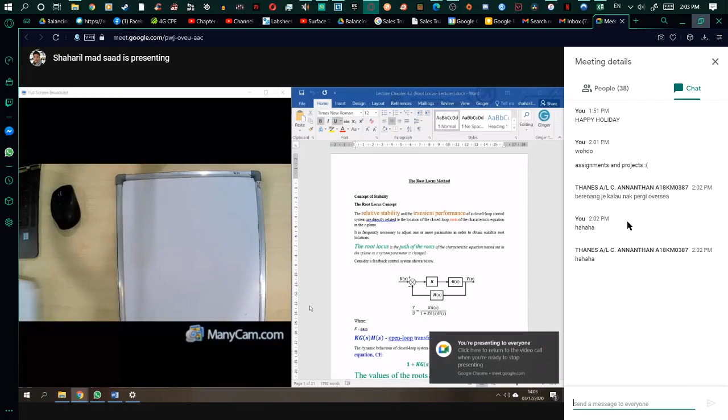Now Johor Bahru is quite critical, right? The numbers of COVID-19 is increased day by day. Okay alright, doctor on call, okay good.

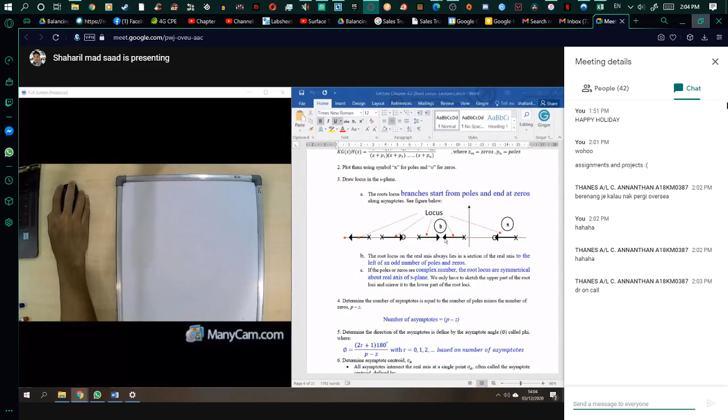Last Sunday we learned about root locus, so we drew a root locus. By the way, there are some rules you need to follow. The most important thing is the starting point is the open loop transfer function, KGH. Then you plot them: if it's a pole, make a cross; if it's a zero, make a circle. This is the rule for the locus, so the pole cannot meet pole, and zero cannot meet zero. If you have pole and pole, that means there will be some breakaway.

So for today we will look at the case if we have a complex pole. Based on this guideline, we can see that if the poles or zeros are complex numbers, the root locus are symmetrical about the real axis of the S-plane. So we just need to sketch the upper part of the root loci and mirror it.

Alright, and then you have done this one: determine the asymptote and so on. We also have done breakaway and breakpoint. So then we want to see what we call it - number 9, we're not done yet for the complex pole. We will see the departure angle after this, and the intersection for the imaginary axis, which we can find using the Routh stability table.

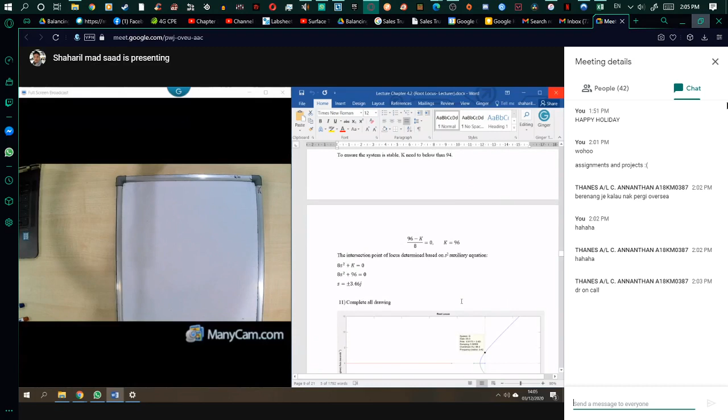So after that we can see the intersection point, it should be 96 here, right? Okay, then this one, the intersection there. Alright, and for example 4.4,

let's just go through this one. So you are given KGH, the open loop transfer function, and from this you can find the zero. In this case you don't have any zero - you don't have S plus something. You only have the pole, which is equal to -2 and also -4. So that means the zero is 0, and the pole is 2. So to find the number of asymptotes,

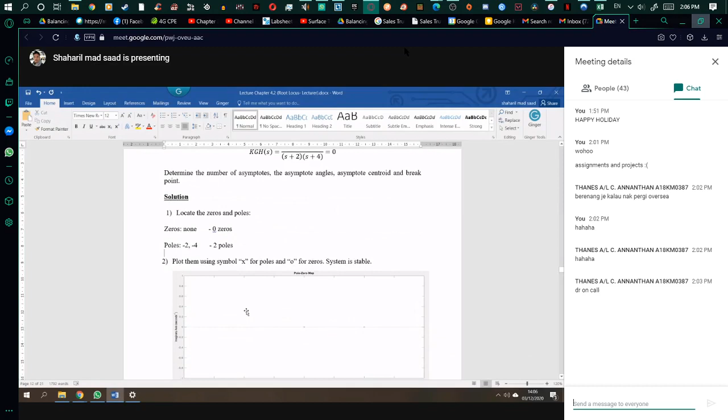you plot it using x or cross for the pole, and circle for zero. You plot it, then next you draw the root locus on the real axis first. So you can see these two poles lie on the real axis, so you just draw it. Since you have two poles here, there will be some breakaway, right?

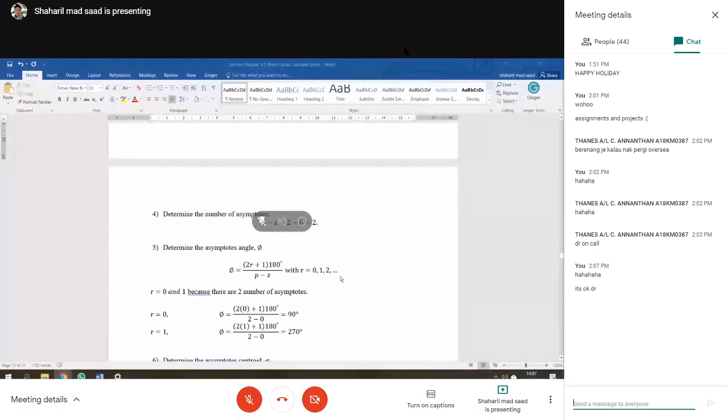Sorry guys, my daughter - I asked her to sleep but she's hyperactive now.

Okay, and then determine the asymptote angle. Then you find P and so on. The asymptote angle is depending on your number of asymptotes. So asymptote means the guideline in order to draw the locus.

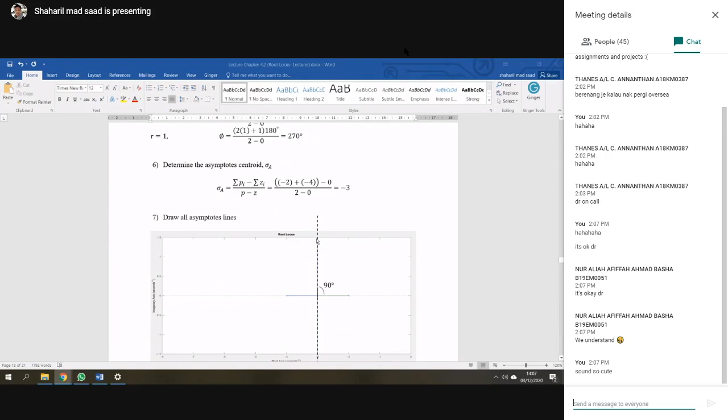So for example, this one you got the asymptote angle equal to 90, that means you draw this one to be 90. But in order to draw this, you need to find the asymptote centroid first. So how to find the asymptote centroid? It's the summation of poles, right?

That means you only have -2 and -2 plus -4, and you don't have 0. This will be -6, then divide by the number of asymptote P minus Z, so 2 minus 0, you get -3. So that means your asymptote centroid is -3 here. Then you need to draw two asymptotes: one is 90, and the other is 270. So this one is 90, 180, 270 here. This is the asymptote.

And then after that, we need to find the breakaway because this is two pole, right? So there will be some breakaway. Okay, so how to find the breakaway?

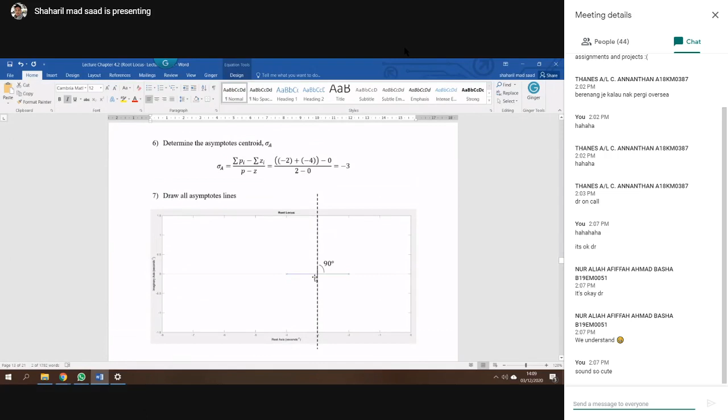So you need to use the characteristic equation 1 plus kgh. From that one, you need to find dk over ds. There we find the k here. So we find the dk over ds equal to 0. And then you got it 2s plus 6. And then you got it s equal to -3.

So that means the breakaway will be also at -3. Okay, at here. And then, okay, so you draw the root locus. Done. Intersection, that means there is no intersection, right? Because you can see that the asymptote angle going straight. So that means your root locus will go straight. So there is no intersection to the imaginary axis.

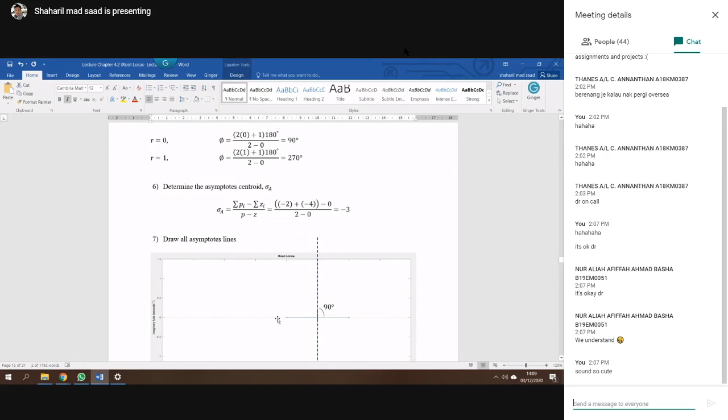So then you complete your drawing. So you can see that this pole, the first pole, it can be going down, right? And the second pole, it can be going up, right? So it doesn't matter if you write it going up and going down. But in order to know in detail how it's going down or up, you need to do like what I told you before. You need to put the value of k here. If that's it, then you try to find the roots. K equal to 0, k equal to 1, k equal to something.

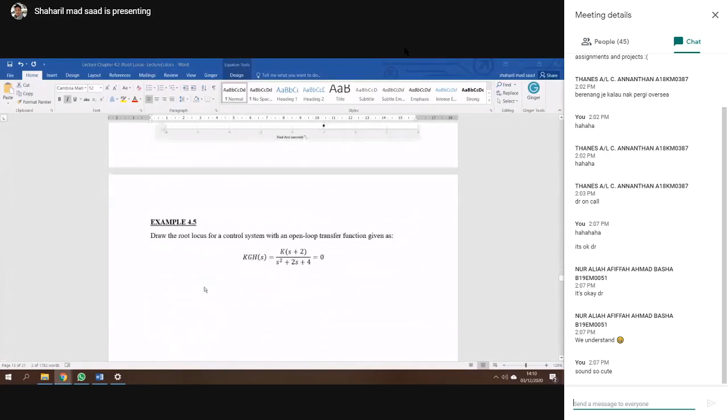That's it, example 4.4. I hope that everyone can take a piece of paper. We can do it together. Maybe you can share with me how you draw your root locus.

Okay, everyone. So I want to do this example 4.5. Okay, done.

Example 4.5. Draw the root locus for a control system with open loop transfer function given as kgh. You are given kgh equal to k times s plus 2 divided with s squared plus 2s plus 4. So for today, we want to look if our system have a complex pole. So what happens, right?

So I hope that you take out a piece of paper and then you can follow my step, so that you can learn it. So first one, you need to locate the zero and pole. So right now we have pole and zero first. Zero now you have this one. Zero, you look at the numerator, right? This one is the denominator. So now you have the zero.

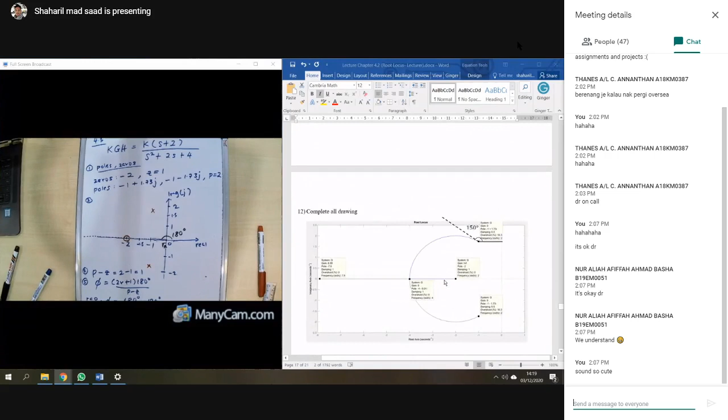So now we look at, you have a pole, second pole, and also a zero. The concept is one of the poles we try to find a zero. So it will be like a circle. However, in order to find the zero, it will have some breakaway point here. You will look into that.

Now the next step is you can find the breakaway point. That means you need another mathematical solution on that. Number 8: in order to find the breakaway, dk over ds equal to 0.

Now you need to have 1 plus kgh equal to 0, so 1 plus k times (s plus 2) divided with s squared plus 2s plus 4 equal to 0. When you settle it out, you get k equal to minus s, times (s plus 2) divided with s... wait, equal to minus (s squared plus 2s plus 4) divided with (s plus 2).

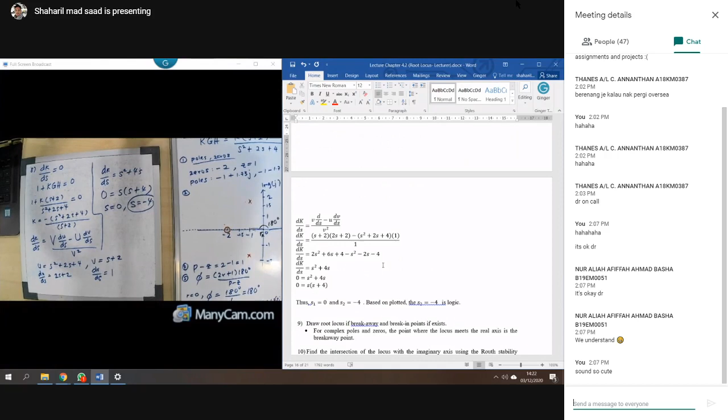So far, do you have any question? I think this one, so you need to solve it by using this formula, right? So we look at this formula during your... I think form 5 and so on.

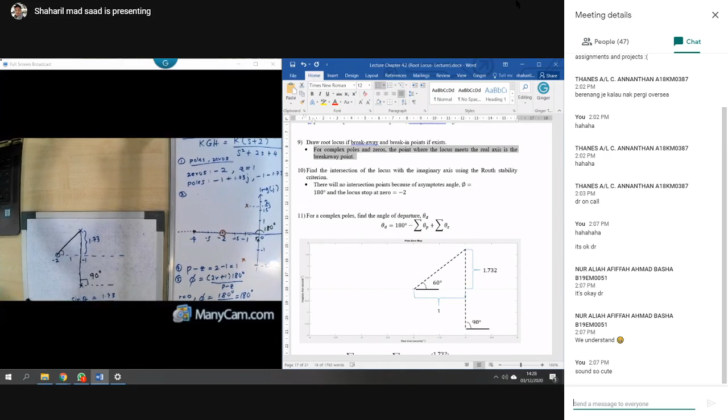Then we can find it by using this formula. So the formula is: the departure angle from the pole is equal to... Departure angle, theta D, is equal to 180 minus the summation of pole angles, and summation of angle to the zeros. So 180 degrees minus the pole angle, this pole, that's 90 degrees, and then from the 0, you add it with 60 degrees.

This point, choose one pole, and then we will look at what is the angle. This pole to here is 90 degrees. Done, right? And this zero to pole is 60 degrees. Done. And then you can find that it is 150 degrees. Done. For this part, do you have any question?

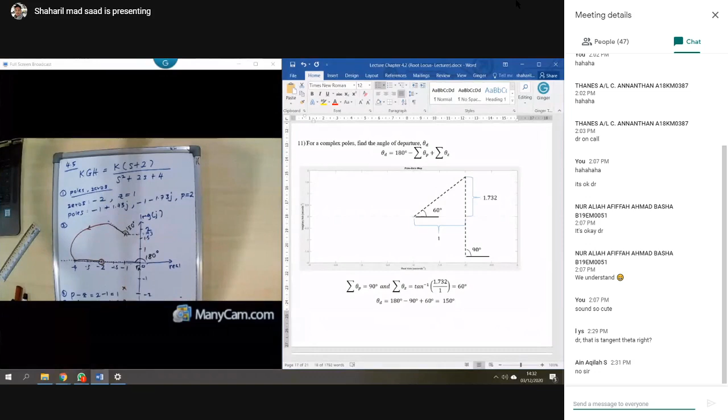Alright, so the next thing is one pole. It has chosen this one, right? One pole has chosen this one. So how about this one? It's only symmetrical. 150, 150 is about this one.

Right, so your locus now will be symmetrical. Going to 4, but it's going to that. Okay, symmetrical. But the size is not symmetrical. Okay, this will be your locus.

Now you will see that this one is starting for k equal to 0 and it will end at k equal to infinity. And this one is k equal to 0 and then it will end to k equal to infinity. Then this one is about 150 or so.

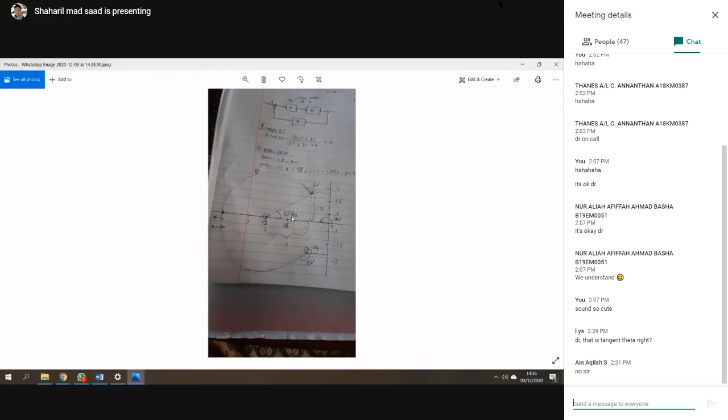Alright, good. Okay, this is what we want. Alright, good. So you have drawn this one. Okay, good. So this is what we want.

Right, and then you can draw the locus here. Pole going to this and going to 0.

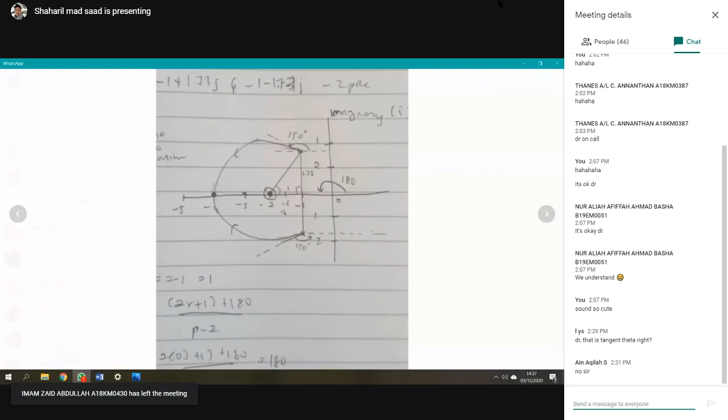Okay, good. But you should have another locus there going to infinity.

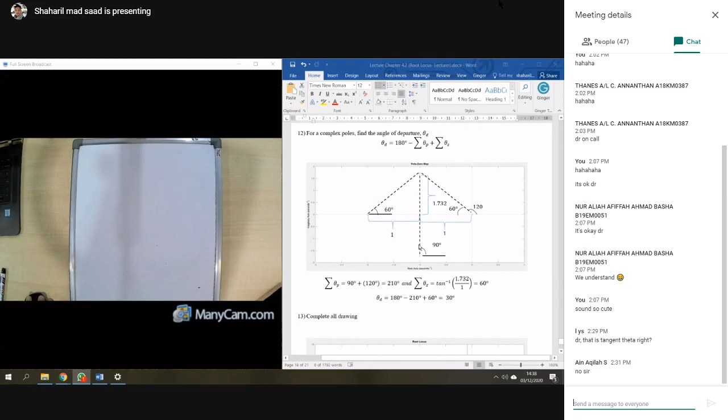Alright, so can we proceed to another example? 4.6.

Wow, you're cute. Go there. I'm having a class now.

Okay, alright, example 4.6. Yeah, I need to draw it again. No, okay, I just go through it. Example 4.6. Everybody, can we proceed?

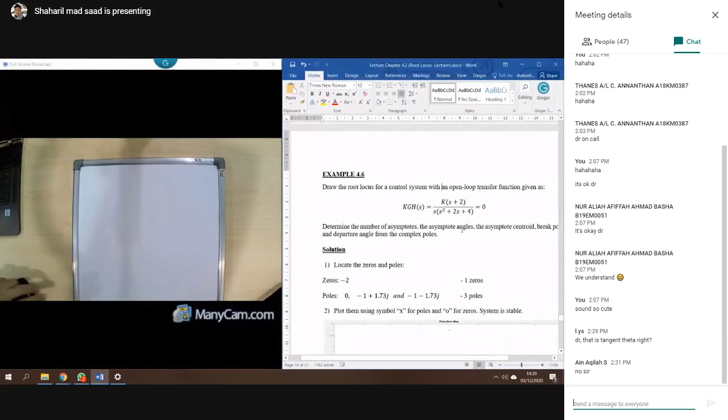Okay, example 4.6. What you have now is KGH(s). So first, you need to locate poles and zeros.

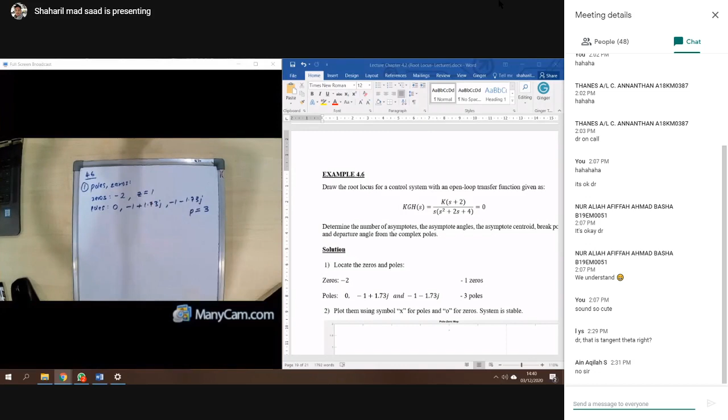Oh, can I undo? Why did I delete all that thing? Okay, can't undo. You need to draw it again.

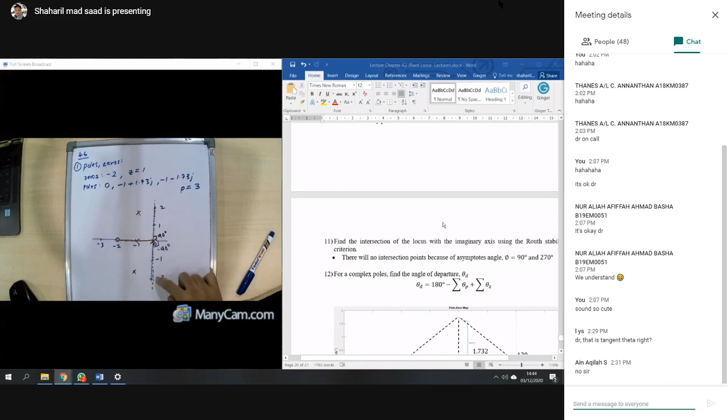Intersection. Do you have any intersection here? Right? You don't have any intersection here, right? Because it has been blocked by the asymptote. Okay, have been blocked by asymptote, right? So no locus can cross the imaginary axis.

Okay, and then you need to find the departure angle. Okay, the departure angle for this one. All right, so how to find the departure angle?

Sarah, I'm moving fast. Go there. Oh, battery's low. Low battery, below battery, low battery. Go, take mine.

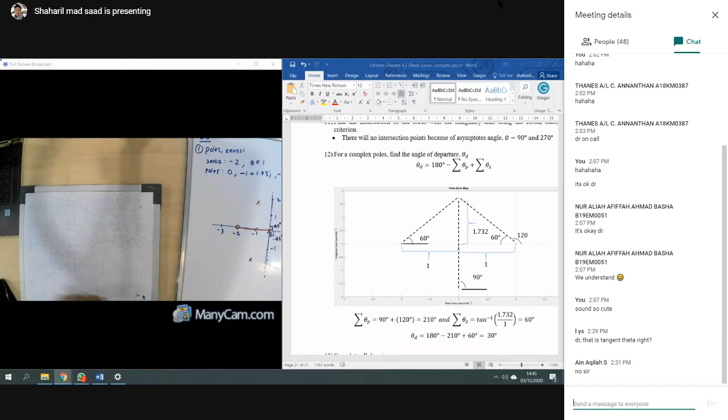Okay. How to draw? How to find the angle of departure?

Okay, now you got it this 2 points here, 2 points here, and you got it this one.

Yeah, actually, if you want to make it clear, you can draw this one. Okay, we just choose this point. Okay, throw. Okay, and then this one. Okay, and then this one. Okay, done.

So this one will be 1.73. So this one will be 1, and then of course you got it here is 60 degree. Okay, based on tangent, right? So tangent theta is equal to 1.73 divided by 1. So you got it, theta is 60 degree, done.

And this one you got it is 90. Okay. How about this one? This one is 1. So this one is 60 degree, right? But we want it to here is 120 degree.

Okay. Alright, so for the pole, we got two angles, 90 degree and 120 degree. For the zero, it's only 60 degree. Okay, so angle of departure, summation 180 degree

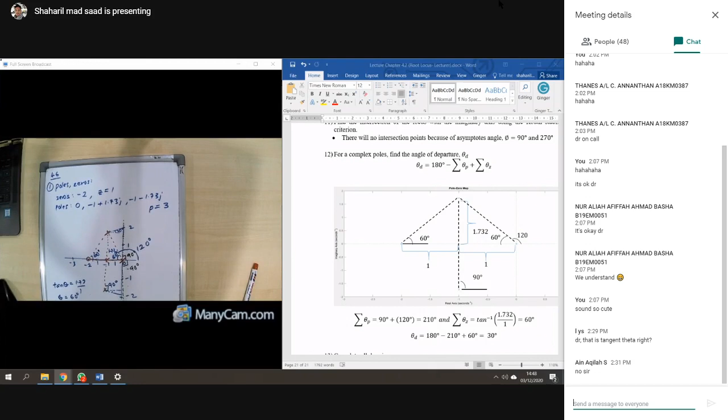Right, then how to draw the locus here? Your locus starts here, right? It's going to find the 30, the asymptote, right? Okay, so you go 30 degree and you go there. So this is your locus, and another one, it is symmetrical here.

Okay, yeah, okay, now it's going to that. Okay, so this one, for k equal to 0, right, and then going to k equals infinity. So this one is k equal to infinity, k equal to 0, right?

Okay, then do you have any question?

No, Doctor. Hey Daniel, no. You just joined the class, right? My computer had a problem, just started now. It's okay, as long as you can join.

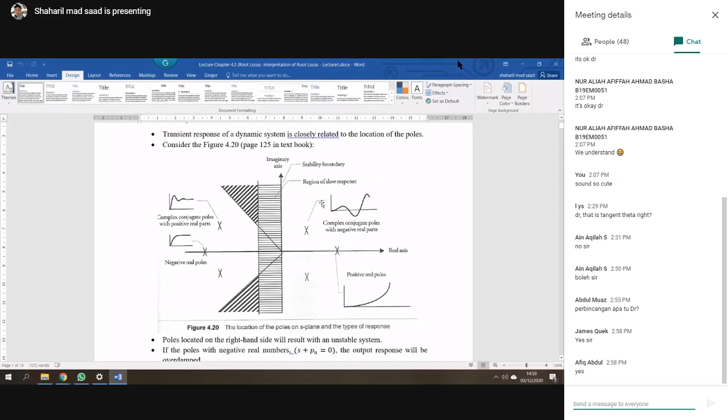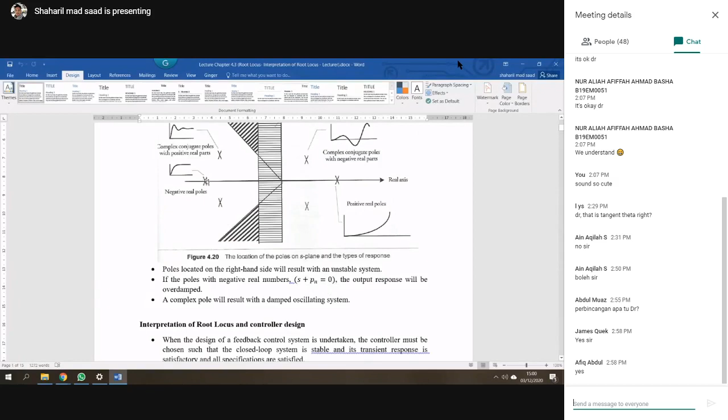Okay, so you can see like here, right? A pole located on the right hand side will result in an unstable system. So if we have a sample located at the right hand side of the imaginary axis, you can see our system is not stable. From that, by drawing the pole or zero, you can see our system is not stable, right? And if the pole has a negative real number, that means s plus a pole equals 0, so s equals minus pole, located on the real axis. For example, this one, a pole located like this, we can say this will react as a first order system. And if you have a system with a complex number, it will react as a second order system, where you have the damping ratio, the natural frequency omega n, and omega d also.

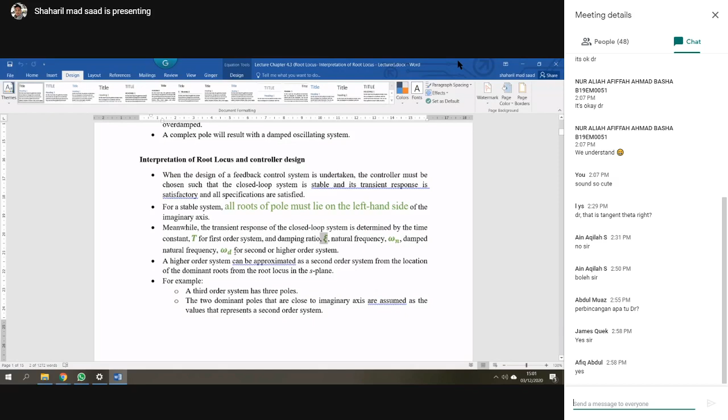So how to interpret the root locus and controller design? We need to have a closed loop system that is stable with a transient response depending on the time constant and so on. We have learned about this one, the transient response has a few parameters: for example, the time constant for the first order and damping ratio, and for the second order, natural frequency and the damped natural frequency. So for higher order systems, for example third or fourth order system, how can we interpret that? By looking at the dominant root on the root locus of the S-plane.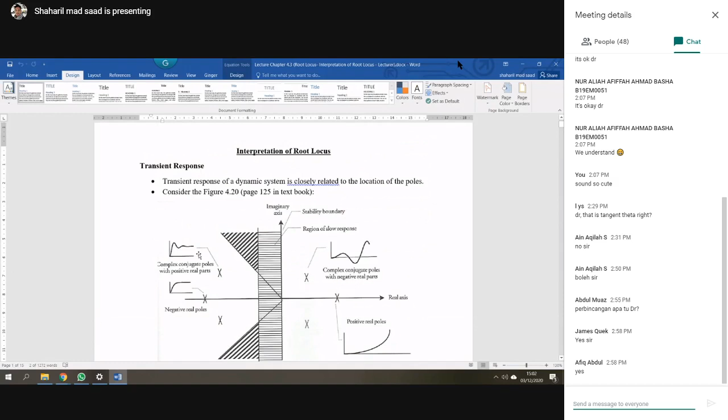For example, a third order system has 3 poles, so the 2 dominant poles that are close to the imaginary axis are assumed as the value that represents a second order system. For example, if you have three poles, we can say our system reacts like a second order system, because there are 2 dominant poles. And from that root locus, we can get the time constant, the damping ratio, omega n, and also the omega d. Alright, and we also can get the K.

So this is quite interesting, how to calculate the K. Alright, so maybe I can show you in MATLAB. Similarly, if we know the pole value, we also can get the time constant and so on. Alright, so the graph will be like this one. Now, imagine that you have 2 poles here, so let me draw it again.

Okay, now you got it, one pole and one pole here. And maybe you can get it one pole here.

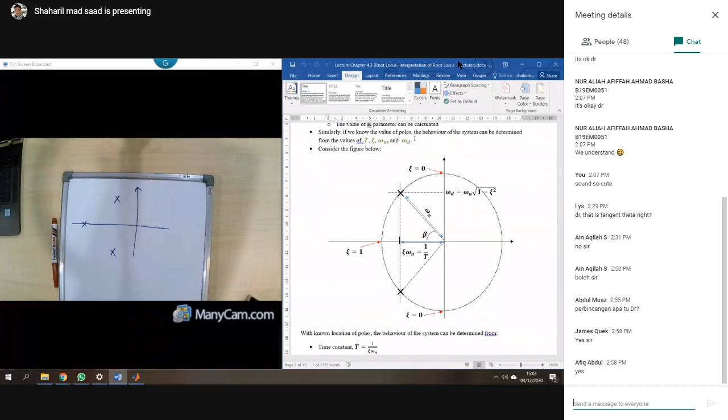So this is our locus, right? So this pole value, from this pole value we can get a lot of information there. For example, we can get here is omega n, the length of this one we can get omega n here. And then at this point we can get omega d, where the formula is, I think you're already familiar with this one for the second order system.

Now you can see that your locus, for example, your locus going to there. Let me draw it clearly for you. So, for example, your locus, you have something like this one, the circle one. So if your root is at this point, that means damping ratio equal to 0. Do you still remember when you got it, your damping ratio equal to 0, you will get a graph like this one. That means there will be a lot of oscillation there, so that means this one will be unstable.

Remember, okay? And if your locus is at there, at this point, that means you will get a damping ratio equal to 1. So remember the damping ratio equal to 1, now you will get the graph is like the first order.

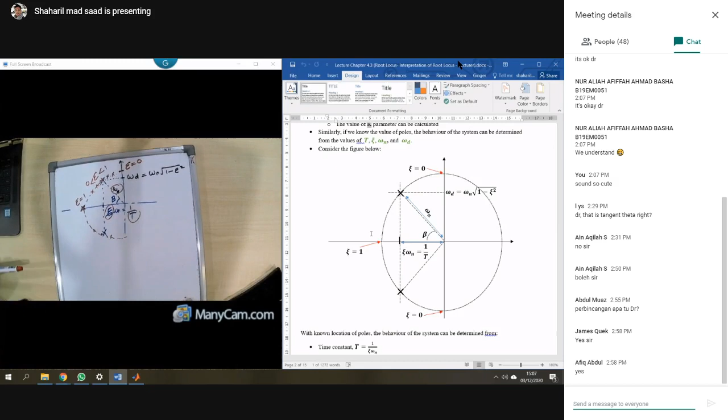Okay, then omega n, this one omega d, done. So this is the information we can get it, time constant, omega n from here, and also we can get the damping ratio given the time constant and so on.

So let's look, this is information you can get. So how to get the damping ratio? You can get it as cos beta, that means the cos beta is like damping ratio times omega n divided by omega n. So you can get the damping ratio. And then you can get omega d from here and so on.

So time constant is equal to 1 over damping ratio times omega n. So from this pole and so on, we can get this parameter. And then if you can get this parameter, you can draw the response and so on.

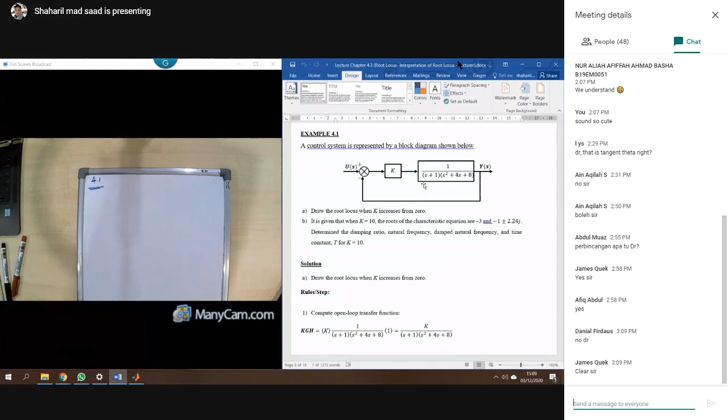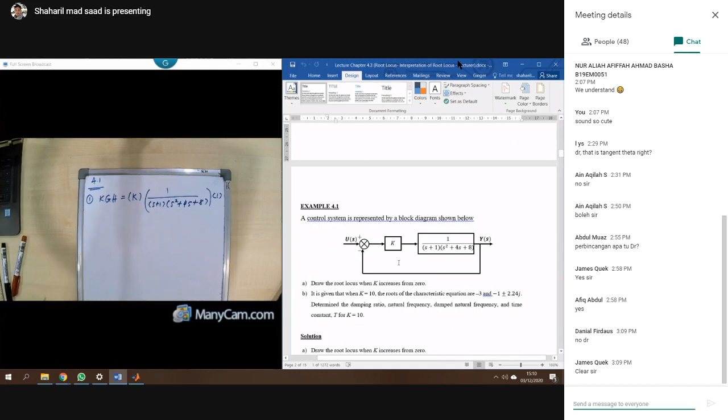So now you need to draw the root locus. By given the block diagram, you need to first find the open loop, KGH. KGH, that means you got K, times 1 over S plus 1, and S squared plus 4S plus 8, done. And then H, now you got it only 1. Then you get KGH is K over (S+1)(S squared plus 4S plus 8. This is the case here.

Remember, from the block diagram, you will get the open loop transfer function first. And then step number 2, locate poles and zeros.

Now you got zeros equal to 0. There is no zero, that means Z equal to 0. And then you got pole minus 1, and this one is minus 2 plus 2j and minus 2 minus 2j. Okay, this is the information.

Alright, and then step 3, you can get the number of asymptotes from P minus Z. So this one, P equal to 3, so 3 minus 0, you got 3. And then number 4, you determine... okay, you start to draw.

Minus 1, minus 2, okay. Now it's 0. Minus 1, minus 2, let's say this one minus 1, minus 2. 1, 2, minus 1, minus 2. Okay. So next what you're going to do, you just draw. You don't have 0, you don't have 0. Okay, now you got a pole, pole is minus 1. And the rest is here, and the other one is here.

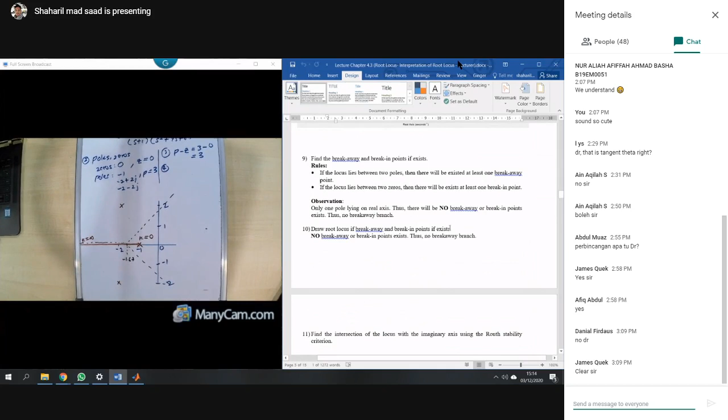Okay, and then the breakaway - nope, there is no breakaway. Okay, this pole going to find what we call zero - there is none. Okay, alright. No breakaway, but also no intersection... yep, it will have some intersection there. This pole going to follow the asymptote, right? So it tries to cross the imaginary axis.

Alright, so how to find the intersection on the imaginary axis? So you need to use the Routh table. Okay, so number 11, so you need to use the Routh table. So find back this characteristic equation 1 plus k*G*H equal to 0. That means 1 plus k divided with s plus 1, s squared plus 4s plus 8 equal to 0. Then you got s cubed plus 5s squared plus 12s plus 8 plus k equal to 0.

Alright, and then you do the Routh table: s3, s2, s1, and also s0. Okay, so remember, s3 the coefficient is 1, then you skip 12, then 8 plus k is together. So this one is 5, and then 8 plus k here, right? The other one is 0. This one is divided by 5, so 5 times 12 is 60.

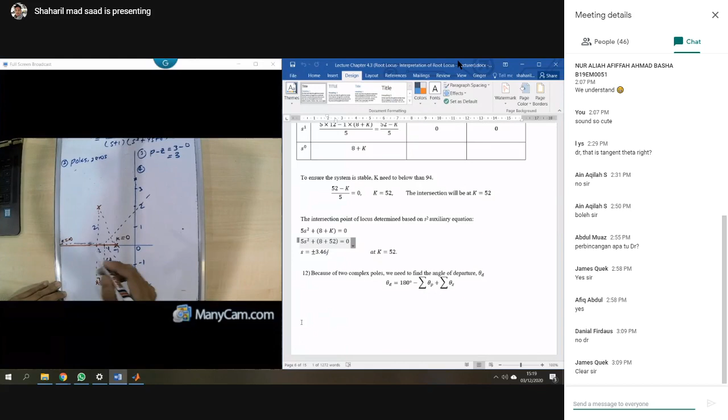So you only have 3 poles, 1, 2, 3. Okay, good. That means we need to find the angle to this one first. Before that, you can find the angle to this one, right? So you can get tangent theta is equal to 2 over 1. So theta is equal to...

What's wrong? What's wrong is it? Can somebody look at that? Minus 1. Okay, there's something wrong here, right?

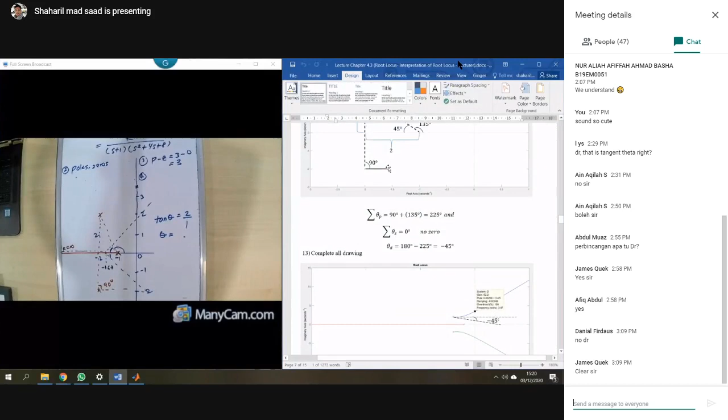Example 4.1. Okay, alright. In this slide, I think there will be some mistake there. This one will be equal to 1, right? Time, right? Is that correct? Guys? Correct right? Don't say put 2 there. Okay, the circle, correct. So this one is equal to what? 64, right? And this one equal to 116. Okay. Please correct that one. Alright.

And you can get 116 here, and then this one you got 206 here. Okay, 206 here, and then you got 26. Okay. Right. Okay.

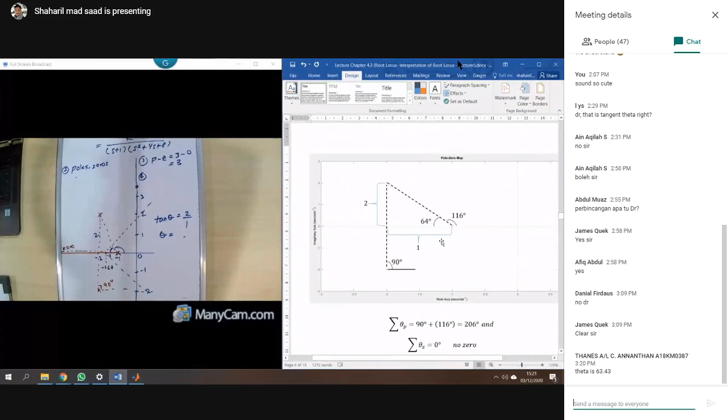Sorry guys. So you need to update the notes, right? Okay. Done. Okay, now we can get it here. Here is 116 degree, and here is 90 degree. Okay good. Alright, so how to find the departure angle?

Departure angle you have here. Right, the departure angle, so 180 minus the summation of poles, and then plus the summation of zeros here. Okay so 180 minus pole, you got 90 degree, plus 116 degree, and you don't have zero, and then you will get minus 26 degree, right? Okay, right.

Done. So how to draw at this point? Minus 26 degree. So this one and this one will be minus 26 degree. Okay, so the departure angle, it will go to this one, and then it will meet the what we call it, the asymptote, and then it will go to this. Okay.

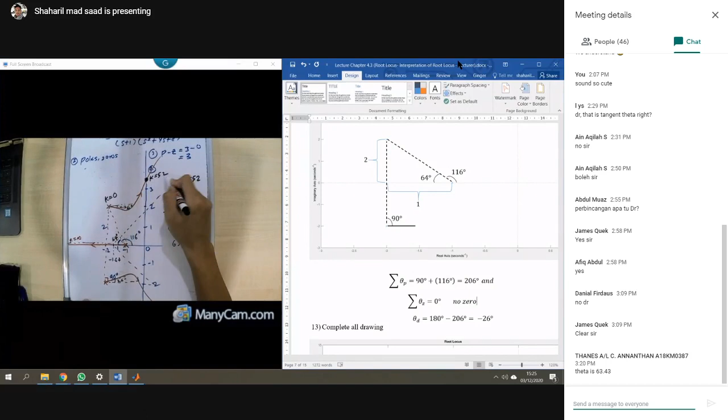You have this locus and so on. Okay, remember we got k equal to 52, right? K equal 52 is the maximum one, this one. So that means this is k equal to 0. So when the k is increased, right, k equal to 1, k equal to 2, until k equal to 52, so this is the maximum one. Okay, can you get it? Understand? Okay, the maximum one, also with this one is 52. K equal to 52.

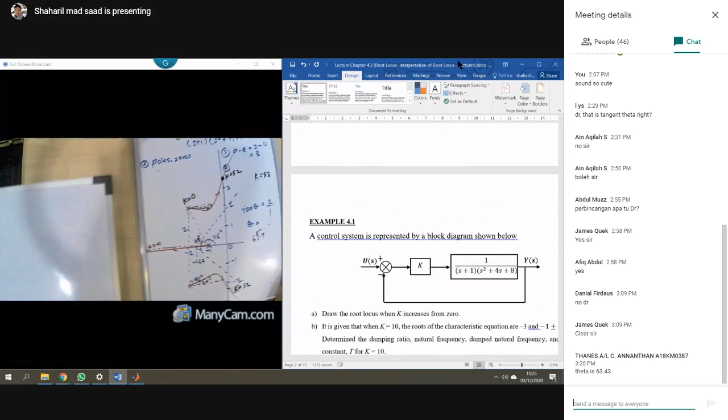Okay, so now if you look at the block diagram here, right, if you put k equal to 52, that means your system is the maximum, what we call it, stability of your system. Okay, right? So you have drawn the root locus there to describe the maximum one. Okay, if I can show you, where is it? Okay, maybe example.

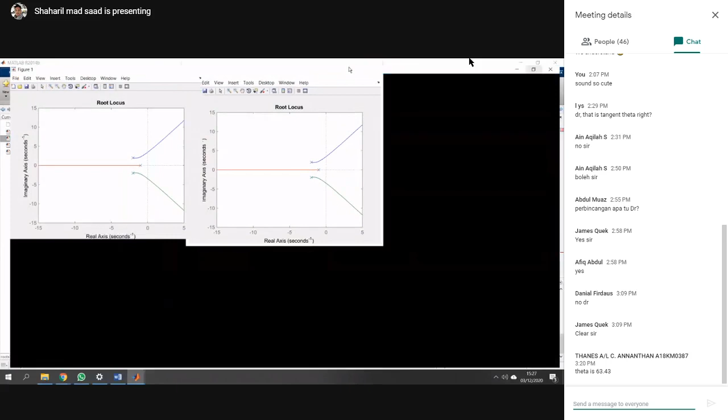Okay, root locus interpretation. Okay, yeah, this one I think. So when you draw the locus, yeah, it's something that will be like this one. So you can see that the gain equal to 52, it will be your, what we call it, your stable, the final one for your system will be stable. Okay, right. Okay, but a lot of damping, overshoot and so on from here.

And this one, the root locus for another one, right, 52. Okay, and you can look at the damping ratio, right? So for your root at the real axis, you can see the damping ratio equal to 1. And for your root at this one, the damping ratio is between more than 0 and less than 1. Okay, so you can see that, right? More than 0 and less than 1. Okay, so this one we can say that our system, right, reacts as a second order response, right? Because there are two roots that dominate, right? So we can say that, right?

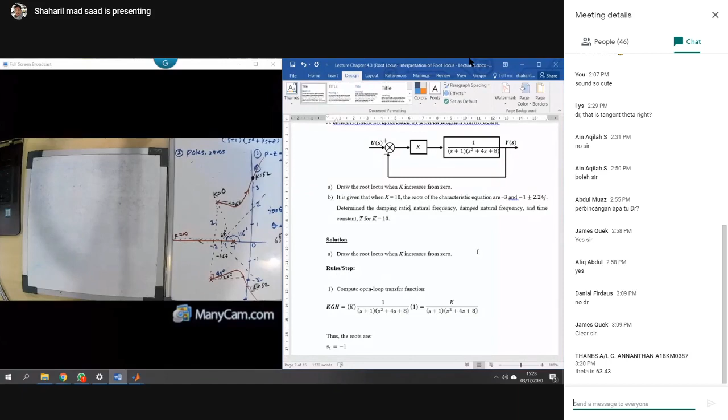Okay, now let's move. Okay, if given k equal to 10, the root of characteristic equation minus 3 and minus 1 plus minus 2.24j, determine the damping ratio, natural frequency, and time constant. Okay, let's look, k equal to 10. K equal to 10.

Yeah, almost there. So it gives you 2.24j minus 1, and minus 2.24. This one, k equal to 10 also. K equal to 10, 10, 10, equal to, yep, minus 3 here.

Okay, so when you got k equal to 10, it is like, if you look at this one, k equal to 10, that means you will draw some line here first. So this one is equal to k equal to 10, then it will give you the root value for this one. And also k equal to 10 here, root value for this one.

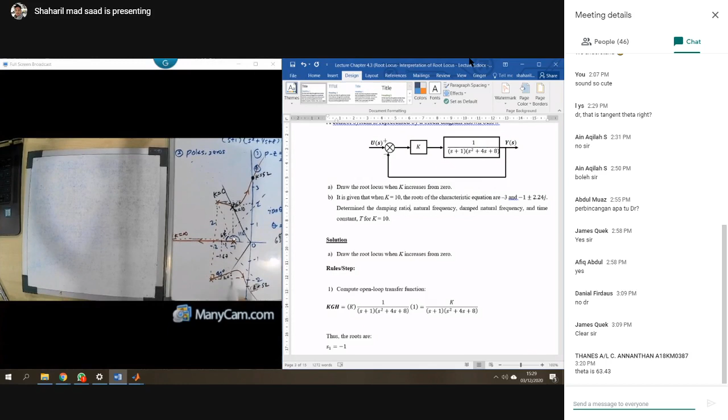So for the k equal to 10, we want to determine what is the time constant, what is the damping ratio here, what is the omega n, and omega d damped natural frequency. Alright, so now what you need to do is you need to apply this one.

Now you got it here. So you got it here, and this one it gives you, maybe we can draw like this one: 2.24j. And also same thing with this one, minus 2.24j. This one you get another one, minus 3.

So what information can we get from here? For this one is minus 1, so that means this is equal to 1. This one equal to 2.24, this one equal to 1. So we can get it here, this is beta.

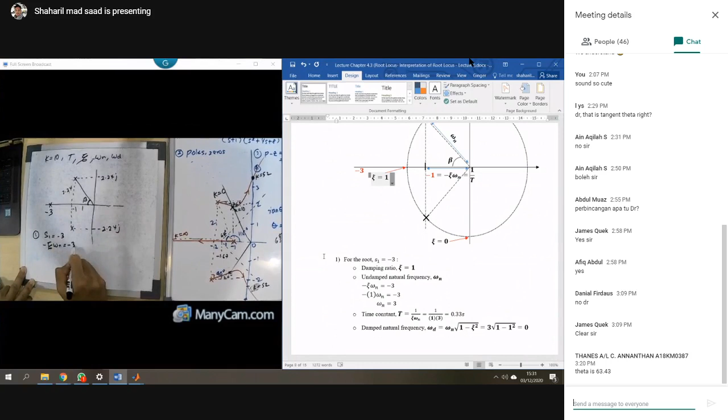Okay, so you got it for S1 equal to minus 3 for this one. You can get minus omega n equal to minus 3. So damping ratio you can get, times omega n equal to minus 3, and then you can get it equal to 3.

Okay, and then for the time constant, t equal to 1 over damping ratio times omega n. You can get it here, 1 over 1 times 3, so equal to 0.33.

Alright, and then from this one you can get omega d is equal to omega n square root 1 minus damping ratio squared. So from this one you can get it. Okay, so for this root you can get all the information here. Alright, so let's look at this root.

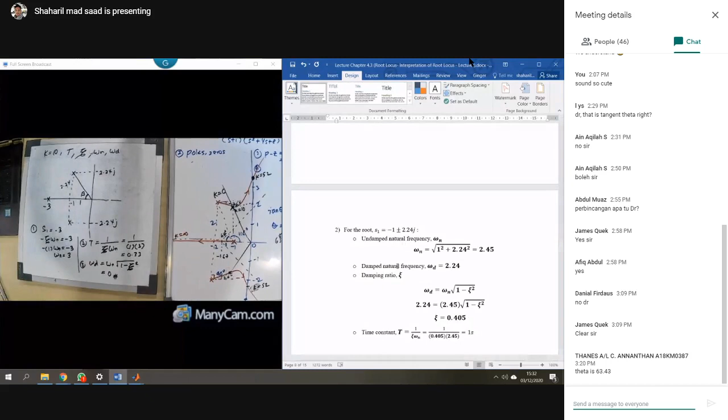So for this root, this both root, what you can get is omega n. This one will be your omega n here.

So for the roots equal to minus 1 plus minus 2.24j, then we can get omega n. You can get it, this is the hypotenuse, so square root of 2.24 squared plus 1 squared, you can get from here, equal to 2.45. And then you can get omega d, omega d, that means this point, so it's equal to 2.24.

And then from this one you also can get the damping ratio. Omega d is equal to omega n square root 1 minus damping ratio squared. So from this one you can get the damping ratio is equal to 0.405.

Okay, and we also can get the time constant if we want. So we can get it here, 1 over 0.405 times omega n 2.45, is equal to 1 second.

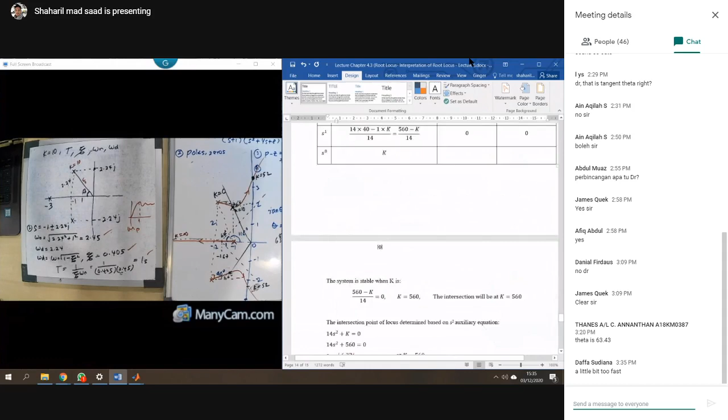Okay, so for the root locus, I think it's clear to you. For this one, we want to find the parameters: time constant, the damping ratio, omega n, and omega d.

So omega d, we can get it straight away from here, right? This one is omega d, right? And omega n is this line, so this line, we can get the hypotenuse. So this one, squared, and square root, we can get omega n. And if you get omega n and omega d, you can get the damping ratio here. And then from the damping ratio, you can get the time constant also if you want.

So this is how you interpret your root locus. Okay, clear?

Okay, so this is where we want to know. If K equal to 0, what is the value of your damping ratio? Because your damping ratio will determine how much they overshoot and so on. How much the natural frequency? What is the value?

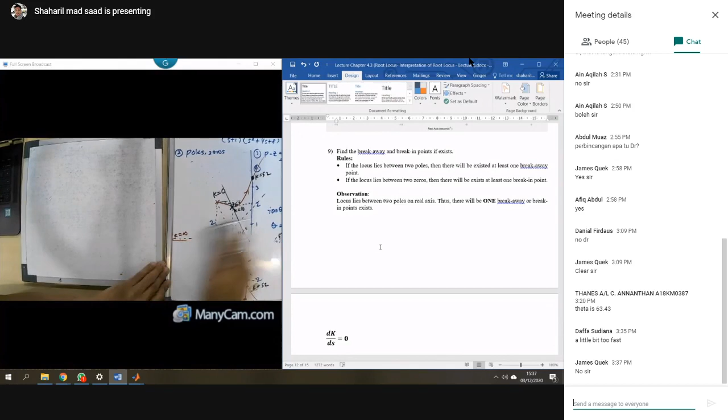Do you have any question about this one before we go to the last example? No? Okay, good. So we go to the last example, but I think it will be new knowledge for you. A lot of you don't know how to use the calculator to solve this simple thing. We will look into that.

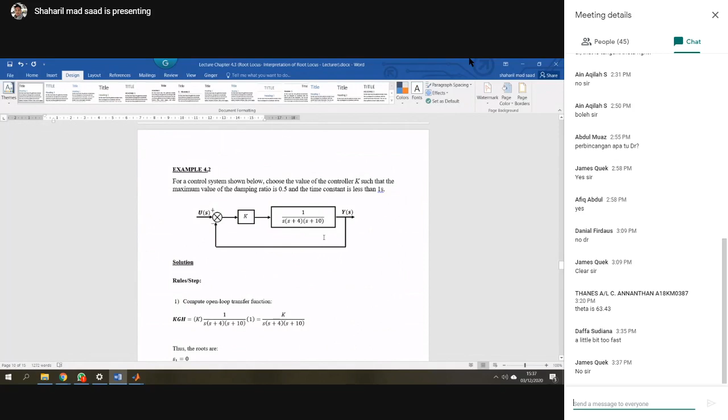This example, 4.2, the last one. For a control system shown below, choose the value of K such that the maximum damping ratio is 0.5 and the time constant is less than 1 second. We are given that we want the damping ratio to be 0.5 and also the time constant less than 1 second.

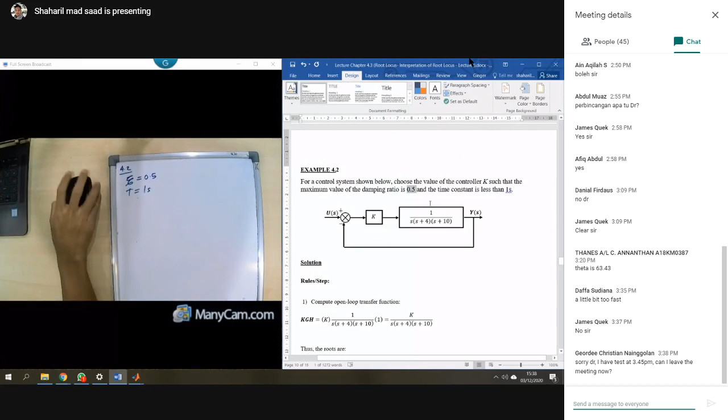So this is our objective, 4.2 here. We want the damping ratio equal to 0.5 and the time constant less than 1 second. You are given the block diagram here, okay, and so on. Then you start to draw the locus, and you got this kind of root locus here.

So maybe I need to draw it also to make sure that you can understand. Let me just draw the root locus.

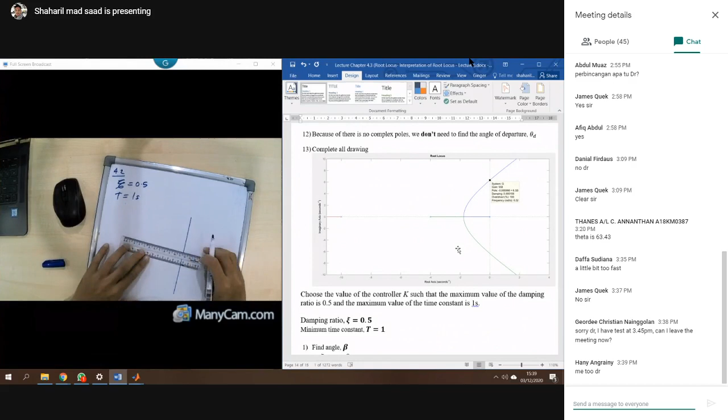Me too, doctor, sorry doctor, I have a test. Okay, yep, you can leave the meeting now. So later on, maybe you can learn it from your friends.

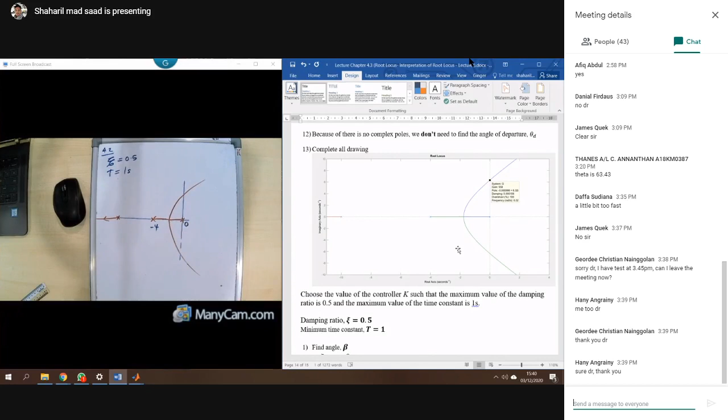This one you got with 0 here, and then you got another one, this one, 0, and also -4. So that means your root locus now goes to this. Done. Then try to find the other one. Done, then you got a break point here, and then it will go to this, and another one go to this. Done. So clear, we already got this.

Remember the damping ratio equal to cos beta, that's the angle there. Then you can get the beta. 0.5 equal to cos beta, then you can get the beta is equal to 60 degrees. So what you do is draw a line, this one equal to 60 degrees. Then you got a point here.

And this point gives you - that's why for this type of question, you need to draw it based on the graph. It gives you this point, 2.46J, and then minus 1.43, this point.

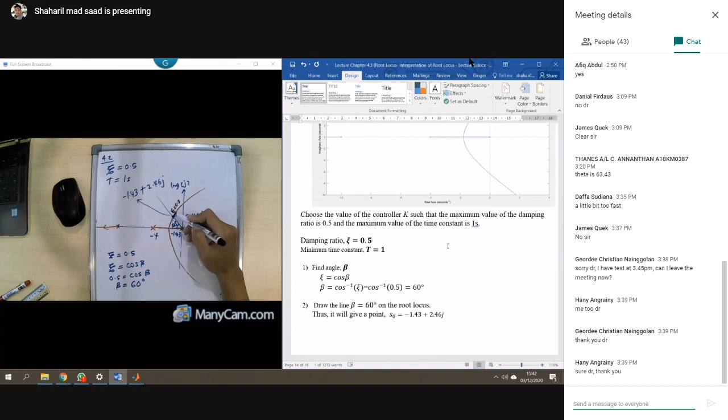Alright, so I write it again: minus 1.43 plus 2.46J. So we want the damping ratio here. 60 degrees will give you this damping ratio equal to 0.5. Clear? This is your root locus. At the damping ratio equal to 0.5, that means 60 degrees, so you got this point, 2.46, and minus 1.43.

So the question asks you, what is the value of K here? So our objective is we want to know what is the value of K here. This one, we know that K maximum, we can get from the Routh table, right? So we want to know what is the value of K here.

So in order to find the value of K here, you can do that. KGH, the open loop, equal to 1. Right, KGH equal to 1. That means your KGH you are given from this point, the magnitude to the point where KGH equal to 1.

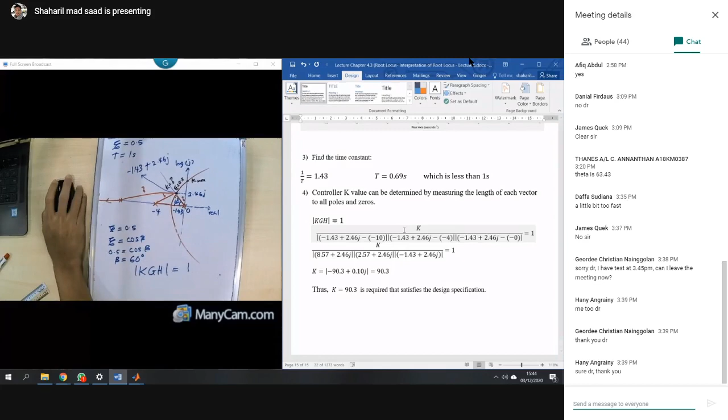That means you have all these four, right? So we want to know this length, what is this length? And another one, you get this one, what is this length? And another one is this one, what is this length? So this length times this length times this length is equal to 1. Alright, good. Then your KGH here is equal to, yep.

K, S plus 4 and S plus 10. Okay, so we want to know the magnitude for this one. That means this point needs to minus with this point, right? Then we can find the magnitude. Okay, so it's equal to K, right?

Minus 1.43 plus 2.46J. You minus with 0, this point. Then we find the magnitude. And you time with...

And then you time with this point also minus with this point. So minus 1.43 plus 2.46J minus with this point, that means minus 4. So minus with negative 4. Okay, done.

And then another point is minus 1.43 plus 2.46j minus with this one. This point is minus 10. Minus 10. Okay, done. So all this one is equal to 1.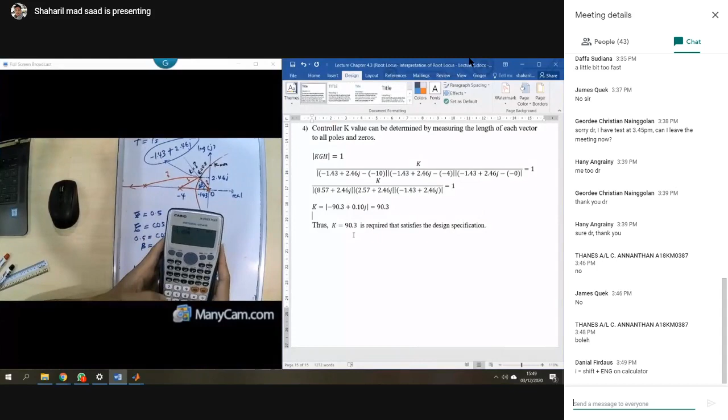Oh no, sorry for that. Yeah, need to type. Okay, sometimes I forget. Minus 1.43 plus 2.46i. So alpha A and solve.

You got it, alpha A and solve, right? Solve, it writes a question mark, right? A question mark, and then you press answer and equal. Now it will save this value to variable A. Can you do that?

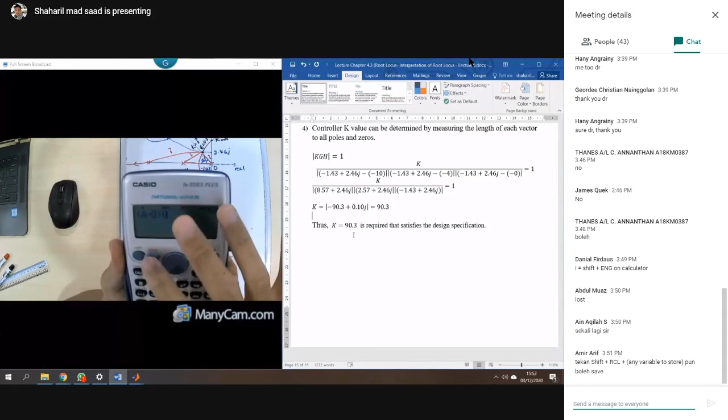Take your alphabet, alpha A minus 0, you times with A. A plus 10. Okay done. Then you press equal, you press equal, you got it.

90.3, right? And this one is i, in complex number. So how to change this complex number to magnitude and angle? Let's see where it is.

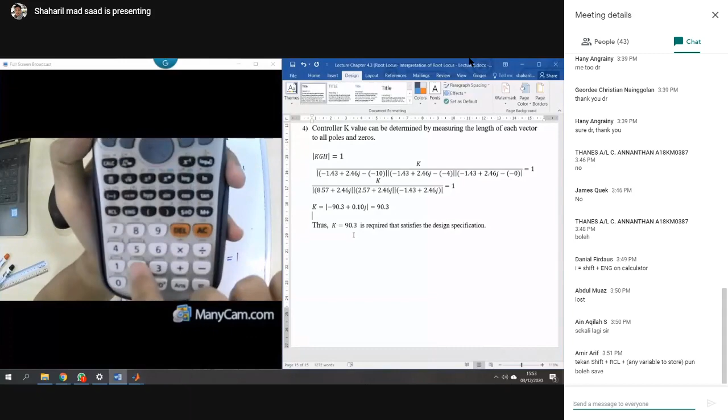In this calculator, you can see that the number 2 here has complex. The name is complex, the number 2 has complex, right? So you just press shift, and then press number 2. The words will come out: argument or theta conjugate, and this one the complex.

So we choose number 3, and then you press equal. So it will show you this is the magnitude 90 and also the angle.

It's a new thing for you, right? Yes sir. Now we got it. K here is equal to 90.3. We just round it, and then the angle is 179 degrees. But we just want the magnitude 90.3.

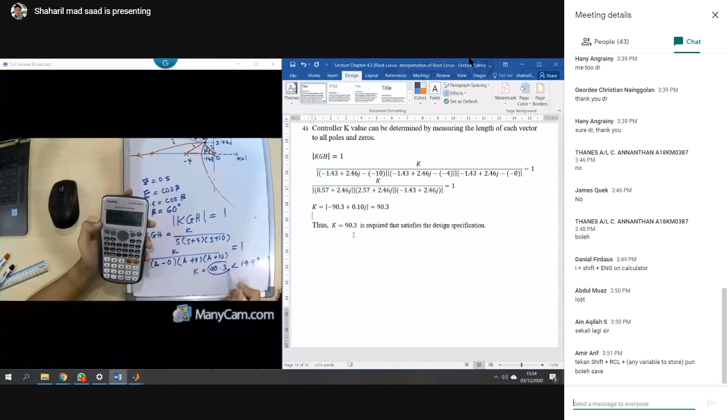So simple, right? Clear? Done. Happy, this is a new thing for you.

So I repeat it back. How to find the value for this K at this point? You already know the point, 1.43, based on this angle. So how to find the K value? You minus this point, minus with this one. You got it length here. We want length here. This point, we got it length here.

There's a formula: K times G times H magnitude equal to 1. So your K*G*H here is equal to 1. So how to solve it? Just put this point minus with this point, times this point minus this point, times this one minus this one.

So if you want to look at example 4.2 here, we can run it. Now for K equal to, how much is it? 90.3.

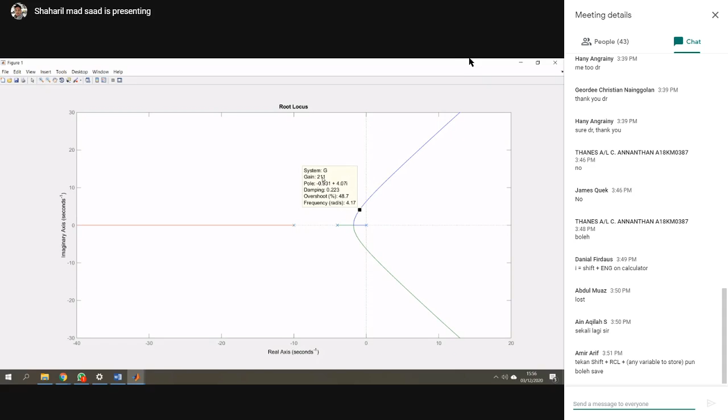So we have answered this question. They want you to find the K value. Do you have any question?

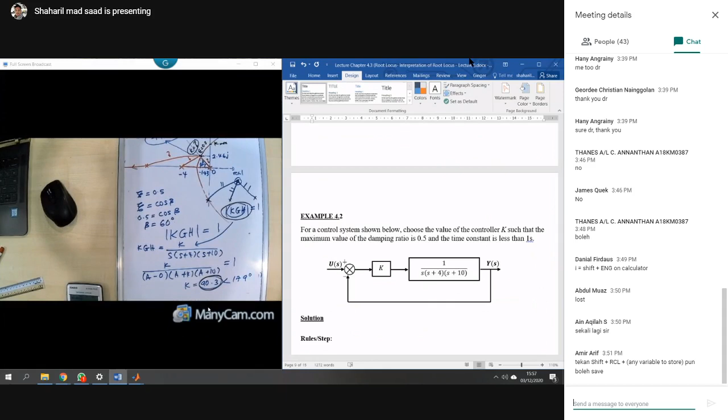But there are two methods, whether you calculate it using the calculator - that means you need to type again this one minus 10, type again this one minus this one - it will take a lot of time, right? So you just use your calculator, save it to variable A. I think this is a new thing for you, or maybe you've done it before.

Last but not least, any question? Last one? No, Doktor.

Okay good. So what I'm going to tell you, we can get the K max by looking at the intersection. But how to get the K around this one? So we need to do this formula.